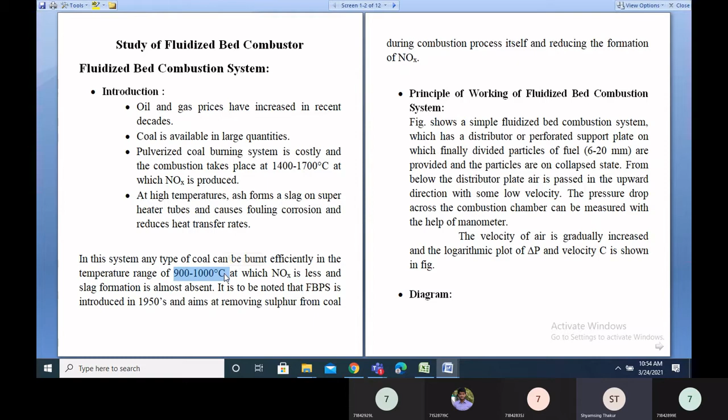The principle of working of a fluidized bed combustion system: a vessel in which water is fitted through tubes, which get heated, converted into steam, and taken out. Here all the heating process is happening - fuel is fed, fluidized combustion air is fed from here, and combustible gases move out.

These are fluidized bed particles, meaning very fine particles of coal used for the particular heating. Whatever heat is generated here is taken up by water, which gets heated and converted to steam. The point to be noticed is the fine particle aspect.

The figure shows a simple fluidized bed combustion system which has a distributor or perforated support plate, on which finely divided particles of fuel, say 6 to 20 mm, are provided, and the particles are collapsed.

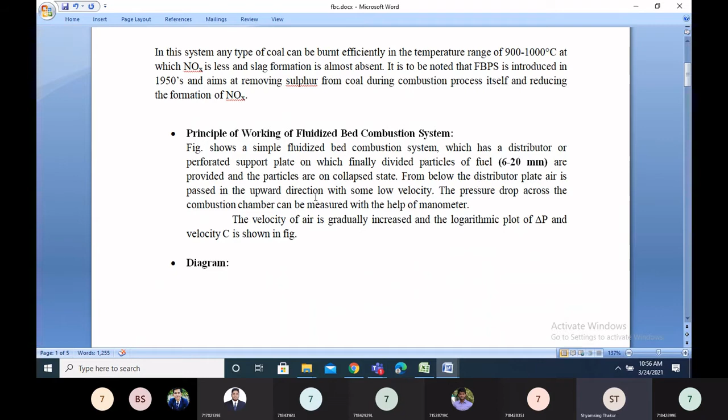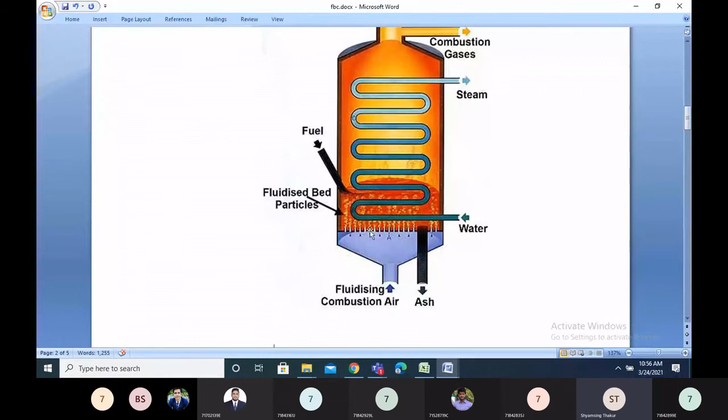From below the distributor plate, air is passed in the upward direction with some low velocity. Here you can see the very fine particles of 6 to 20 mm, and the fluidized combustion air is passed through this, moving upward.

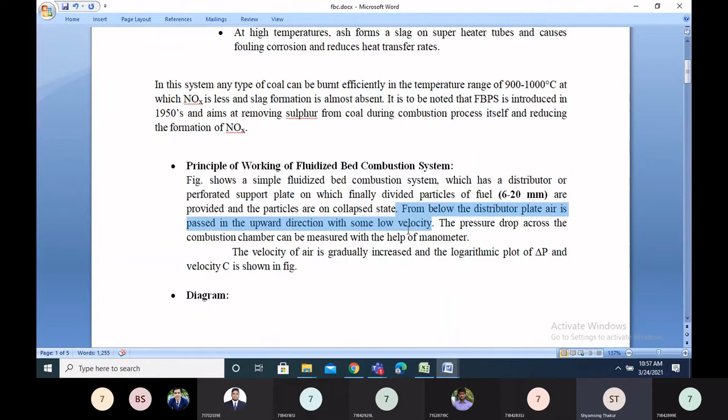The pressure drop across the combustion chamber can be measured with the help of a manometer, and the velocity of air is gradually increased, as shown in the logarithmic plot that we will discuss.

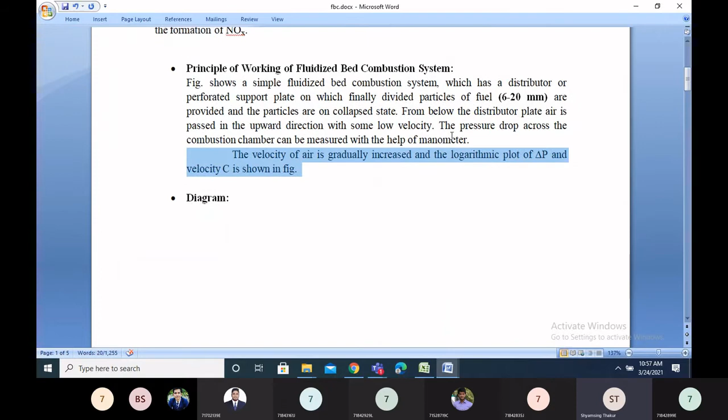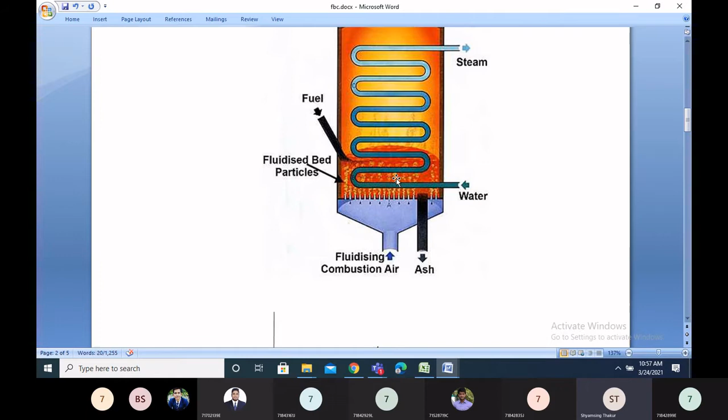With low velocity, air is passing through very small coal particles. When particles are bigger, their surface area is less. When converted into fine particles, the surface area is increased, which improves combustion and heat transfer. That is the concept used very efficiently here.

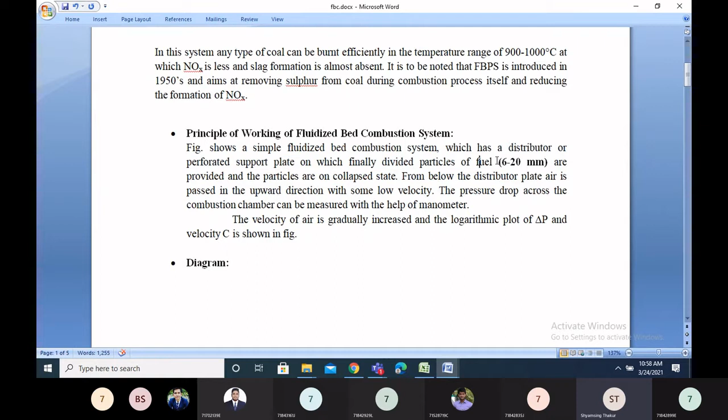So what is there in the system? It has a distributor or perforated support plate with finely divided particles of fuel, 6 to 20 mm, provided in a collapsed state, and from below the distributor plate air is passed upward with some low velocity.

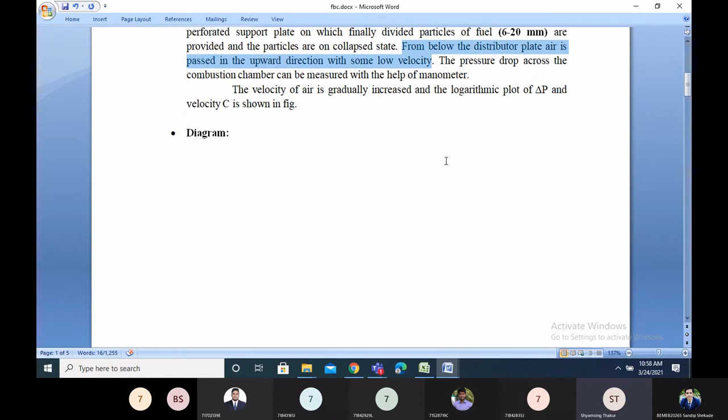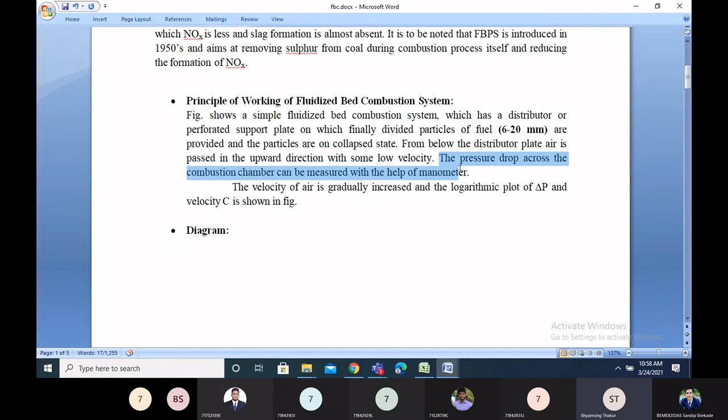This particular path shows that as the particles are fine, they will move with some motion along with the air. From below the distributor plate, air is passed upward with low velocity, and the pressure drop across the combustion chamber can be measured with manometers. The velocity of air is gradually increased and a logarithmic plot is shown.

That can be seen here: initially it increases, then stabilizes. Up to point A, the bed is stable. Between A and B, the bed is unstable, and the particles adjust their position to present as little resistance to flow as possible.

Up to A, the bed is stable; between A and B, the bed is unstable, and particles adjust their position as resistance to flow occurs. When air comes from downward, the particles come into flow and adjust their position to minimize resistance, so the particles are just in contact with each other at point A.

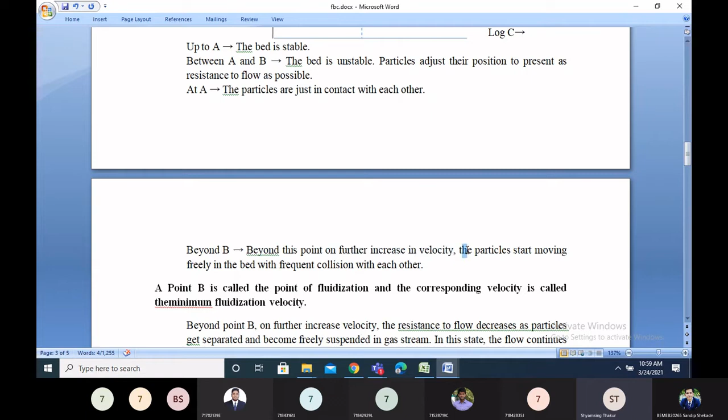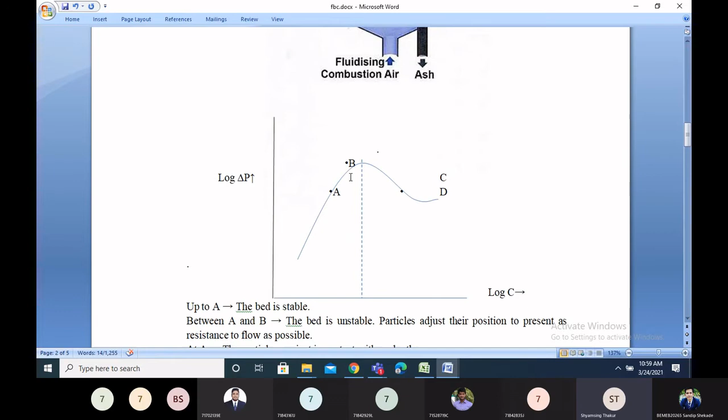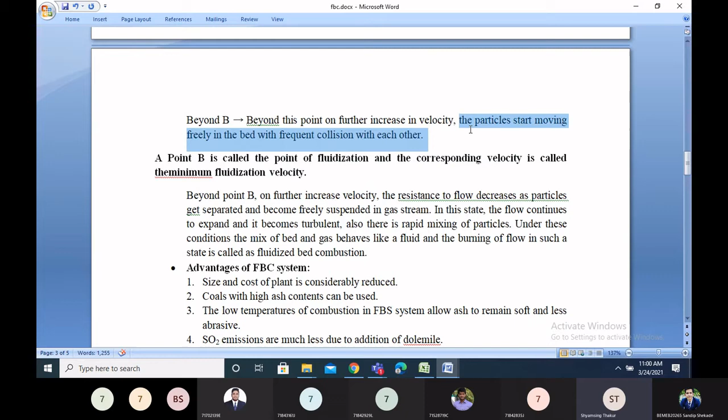Beyond point B, on further increase in velocity, the particles start moving freely in the bed with frequent collision with each other. So when the velocity increases, the particles start moving and it forms a motion over there, as can be seen in the picture.

Point B is called the point of fluidization, and the corresponding velocity is called the minimum fluidization velocity. Beyond point B, on further increase in velocity, the resistance to flow decreases as particles get separated and become freely suspended in the gas stream.

In this state, the flow continues to expand and becomes turbulent. Also, there is rapid mixing of particles. Under this condition the mix of bed and gas behaves like a fluid, and the burning of the flow in such a state is called fluidized bed combustion.

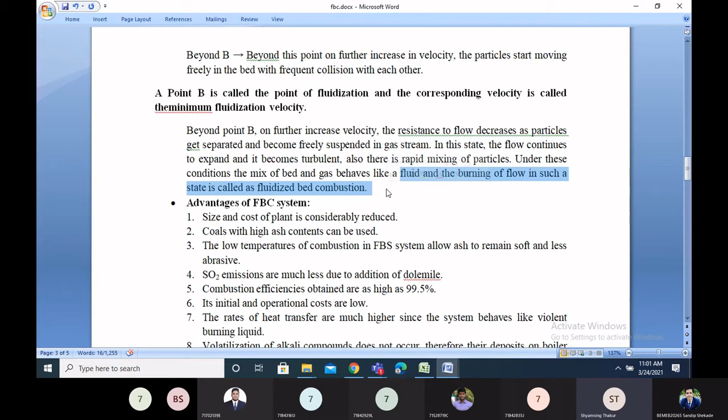So beyond point B, the resistance to flow decreases, the particles become freely suspended in the gas stream, the flow becomes turbulent, and there is rapid mixing of particles, which leads to the term fluidized bed combustion. So quite easy to understand. Now, what is the advantage of this kind of fluidized bed combustion?

The advantages of FBC systems are: size and cost of plant is considerably reduced as there is efficient heating. So for the same capacity of the combustion plant, you need a smaller size, and the efficiency of combustion is increased due to increased heat transfer.

Coal with high ash content can be used - any type of coal can be used with this particular system because it is an efficient process.

The low temperature of combustion in FBC systems allows ash to remain soft and less abrasive. We know initially there were temperatures up to 1400 before FBC. Later on it was reduced to 900 to 1000 degrees Celsius, meaning the lower temperature compared to before allows ash to remain soft and less abrasive.

SO2 emissions are much less due to addition of dolomite. Remember, this is again asked in many examinations - SO2 emission is less due to addition of this particular material in the feed.

Combustion efficiencies are often as high as 99.5%, which is considerably high. And the initial and operational costs are low.

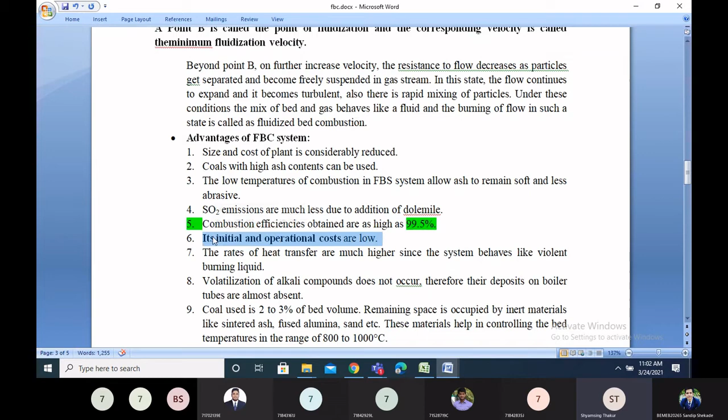The rate of heat transfer is much higher since the systems behave like a violently boiling liquid. Also, the volatilization of alkali compounds does not occur here, therefore their deposits on the boiler tubes are almost absent.

The coal used is 2 to 3% of the bed volume. Remaining space is occupied by inert material like sintered ash, fused alumina, sand, etc. This material helps in controlling the bed temperature in the range of 800 to 1000 degrees Celsius.

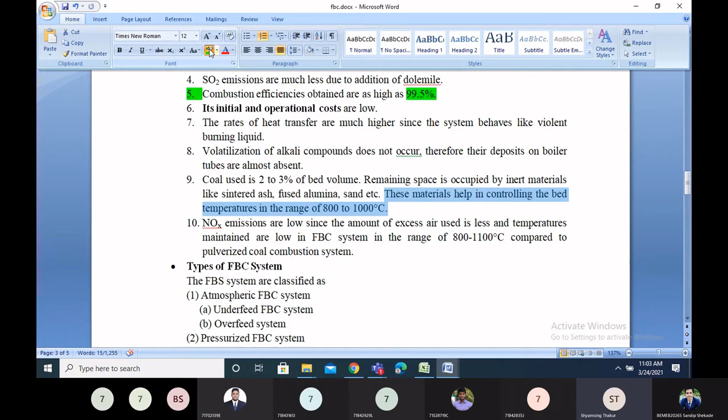This is actually the main advantage - the combustion temperature is lowered from 1400 to 1700 down to a range of 800 to 1000 degrees Celsius, since NOx is produced at higher temperatures.

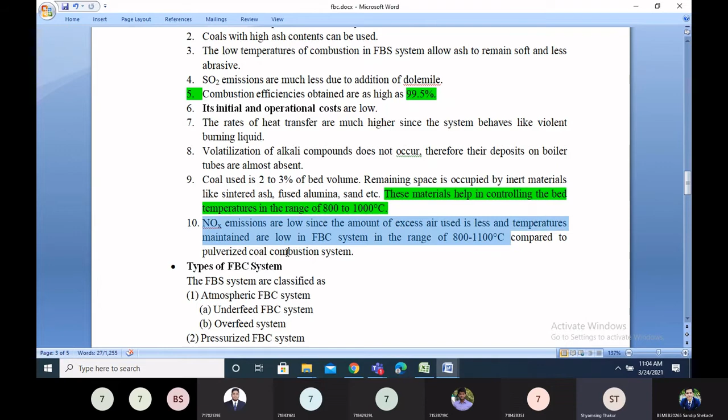In this system, NOx emissions are low since the amount of excess air used is less, and temperatures maintained are low in FBC systems, in the range of 800 to 1100, max 1100, as compared to pulverized coal combustion systems.

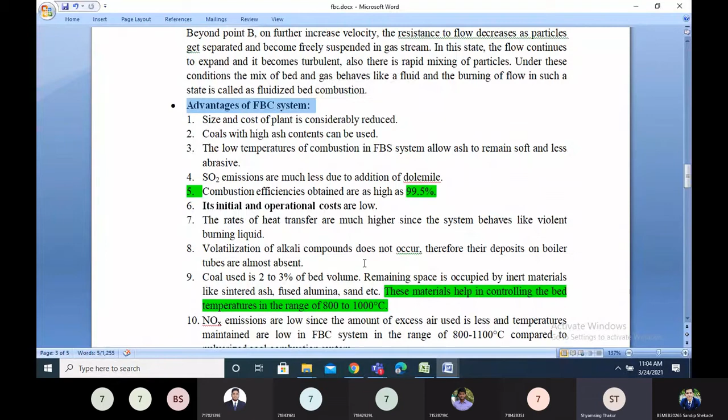So these are basically the advantages of FBC systems. Now moving ahead with the topic of discussion, there are different types of FBC systems.

The FBC systems are classified as atmospheric FBC systems and pressurized FBC systems. Atmospheric FBC systems are further classified as underfeed FBC systems and overfeed FBC systems. So which are atmospheric FBC systems?

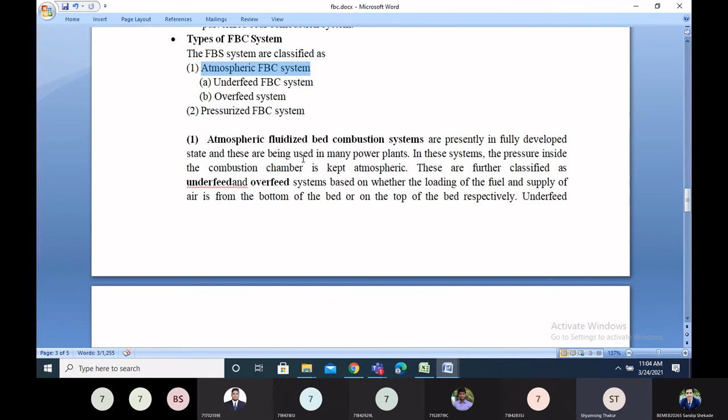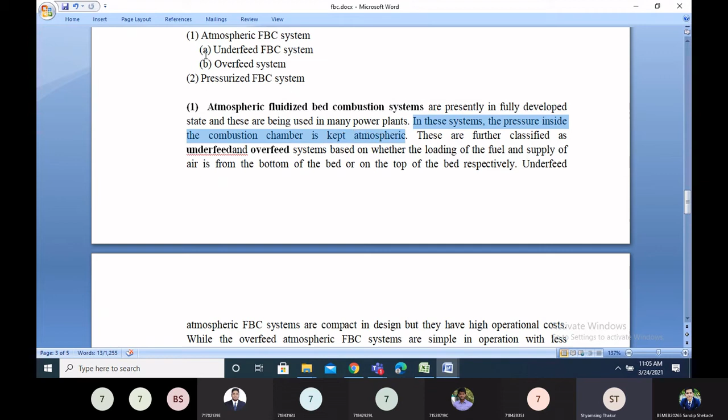Atmospheric fluidized bed combustion systems are presently in a fully developed state, and these are being used in many power plants - this is to be noted. In these systems, the pressure inside the combustion chamber is kept atmospheric, which is why they are called atmospheric fluidized bed combustion systems.

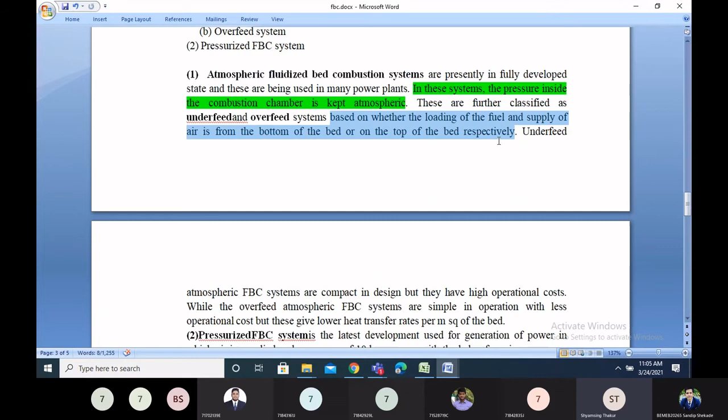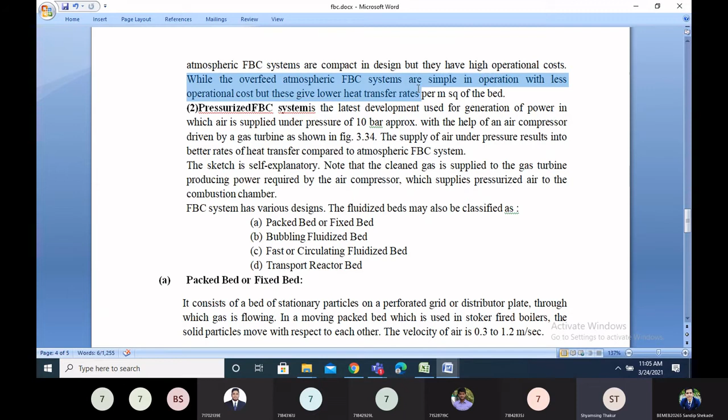These are further classified as underfeed and overfeed systems, based on whether the loading of the fuel and supply of air is from the bottom of the bed or the top of the bed respectively. Underfeed atmospheric FBC systems are compact in design but have high operational cost, while overfeed atmospheric FBC systems are simple in operation with less operational cost, but give a lower heat transfer rate per square meter of the bed.

So there are some advantages and disadvantages of these sub-classifications - underfeed and overfeed atmospheric fluidized bed combustion systems. Based on whether the loading of fuel and supply of air is from the bottom or top of the bed respectively, underfeed atmospheric FBC systems are compact in design, but they have higher operational cost.

Overfeed atmospheric fluidized bed combustion systems are simple in operation with less operational cost, but give lower heat transfer rate. Compared to underfeed, it has some advantages and disadvantages. The advantage of underfeed system is that it is compact in design, but the disadvantage is higher operational cost. In case of overfeed, it has less operational cost but lower heat transfer rate. You must remember this.

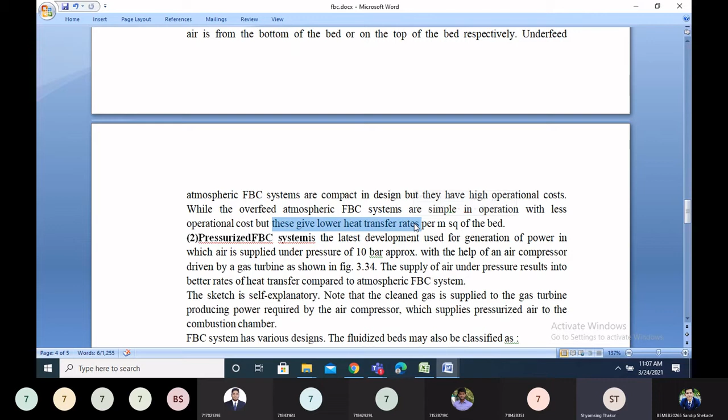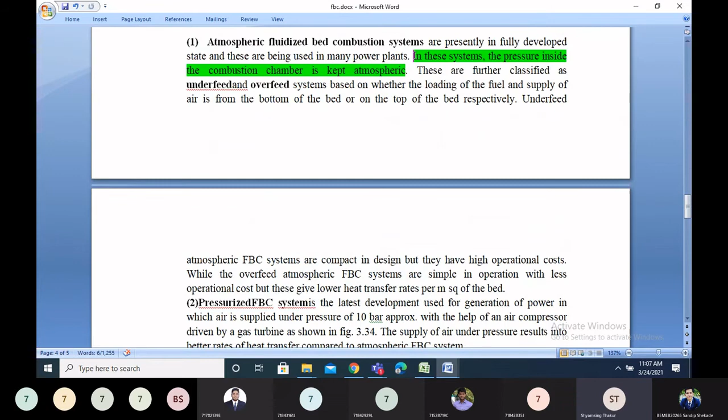Now moving to atmospheric fluidized bed combustion systems, the pressure used is atmospheric. Here the pressure inside the combustion chamber is atmospheric, while in pressurized FBC systems, which are the latest development used for generation of power, air is supplied under pressure of approximately 10 bar with the help of an air compressor driven by a gas turbine.

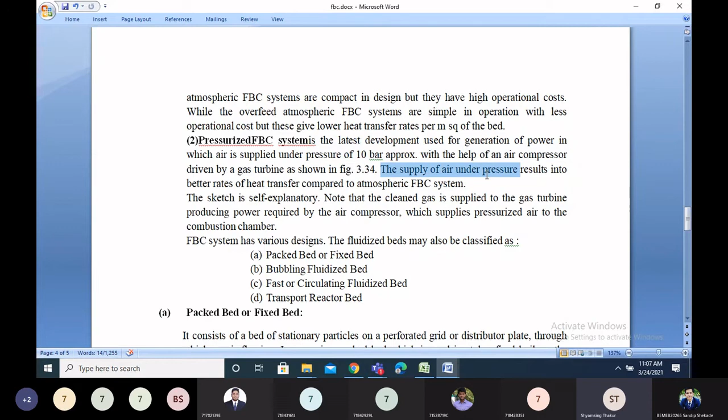As shown in a particular figure, which we will discuss in the next subsequent discussion, with the help of air compressor and the supply of air under pressure, this results in a better rate of heat transfer compared to atmospheric FBC systems.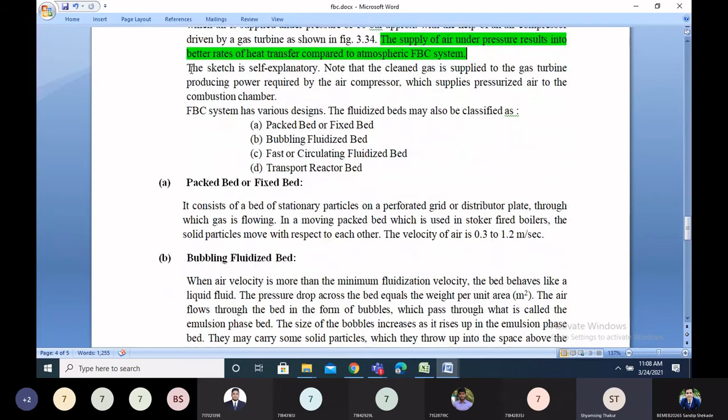Note that clean gas is supplied to the gas turbine, producing power required for the air compressor, which supplies the pressurized air to the combustion chamber.

FBC systems have various designs. The fluidized bed may also be classified as packed bed or fixed bed, bubbling fluidized bed, fast or circulating fluidized bed, and transport reactor bed. The packed bed or fixed bed consists of stationary particles on a perforated grid or distributor plate through which gas flows. In a moving packed bed, used in stoker fired boilers, solid particles move with respect to each other at a velocity around 0.3 to 1.2 meter per second.

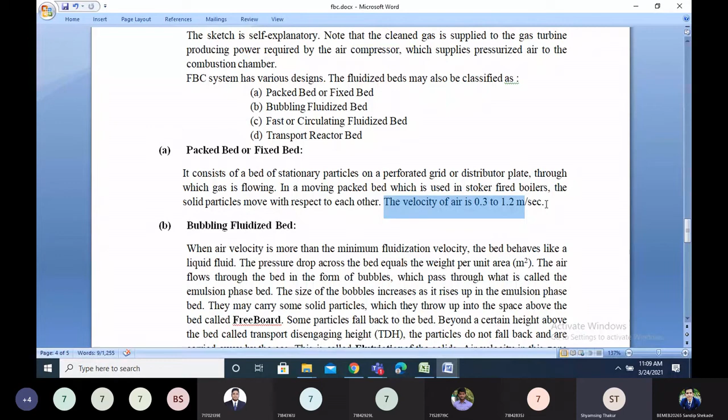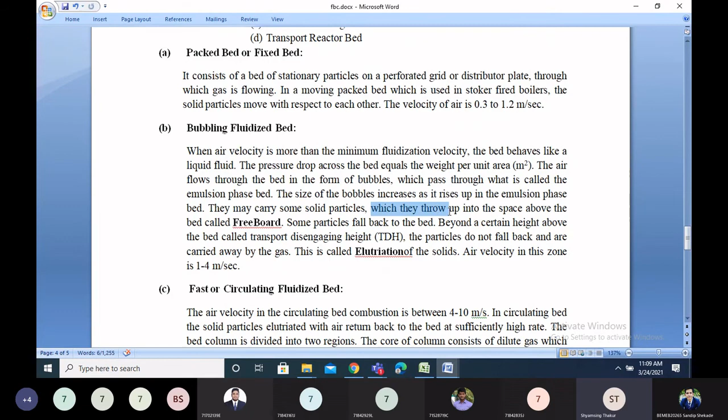Coming to bubbling fluidized bed: when the air velocity is more than the minimum fluidization velocity, the bed behaves like a fluid, and the pressure drop across the bed equals the weight per unit area. The air flows through the bed in the form of bubbles, which pass through what is called the emulsion phase bed. The size of the bubbles increases as they rise up in the emulsion phase bed, and they may carry some solid particles, which are thrown into the space above the bed called freeboard.

Some particles fall back to the bed beyond a certain height above, called the transport disengaging height. The particles that do not fall back are carried away by the gas; this is called elutriation of the solids. Air velocity in this zone is 1 to 4 meter per second.

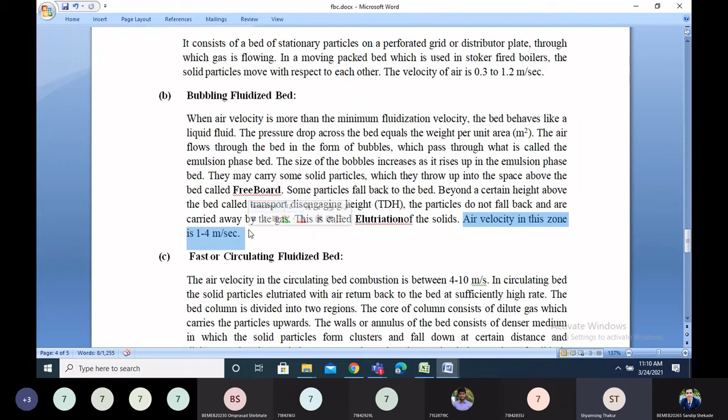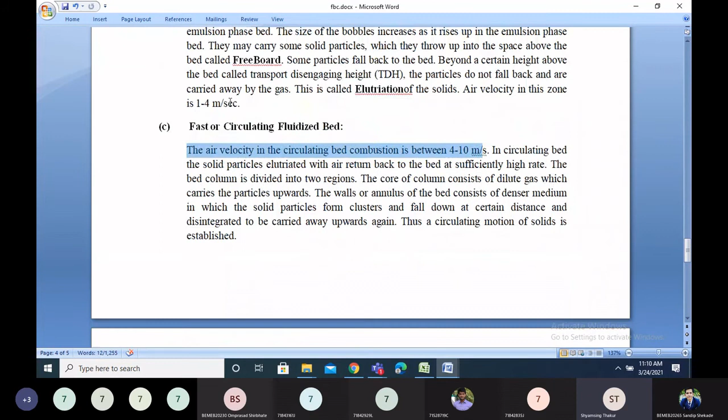Moving to fast or circulating fluidized bed: the air velocity here is 4 to 10 meter per second, and in the circulating bed, the solid particles elutriated with air return back to the bed at a sufficiently high rate. The bed combustion column is divided into two regions. The core of the column consists of dilute gas which carries particles upward, and the walls or annulus of the bed consist of denser medium in which solid particles form clusters, fall down at a certain distance, and disintegrate to be carried away upward again. Thus a circulating motion of the solid is established.

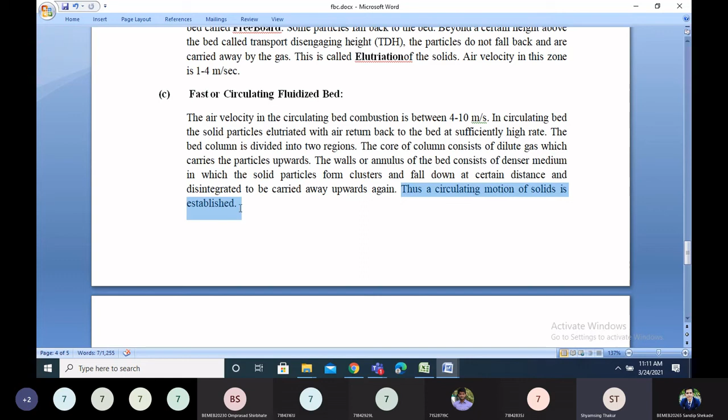Moving to transport reactor bed: when the velocity exceeds 10 meter per second, which is the highest in our discussion range, solid particles are entrained and elutriated with flowing air. They do not fall back as the air velocity is more than the terminal velocity of the bed. This type of bed is usually used in pulverized coal fired boilers.

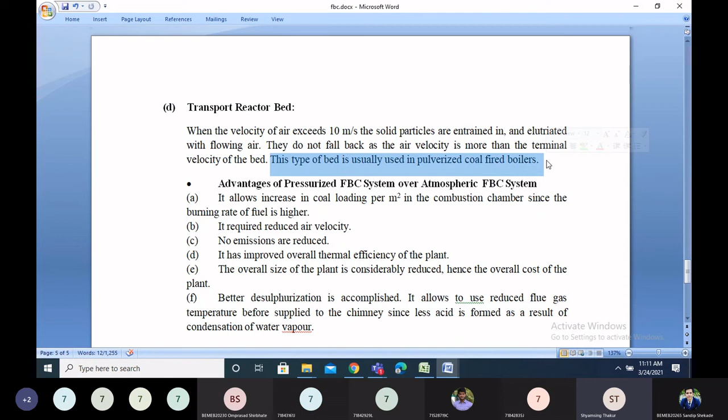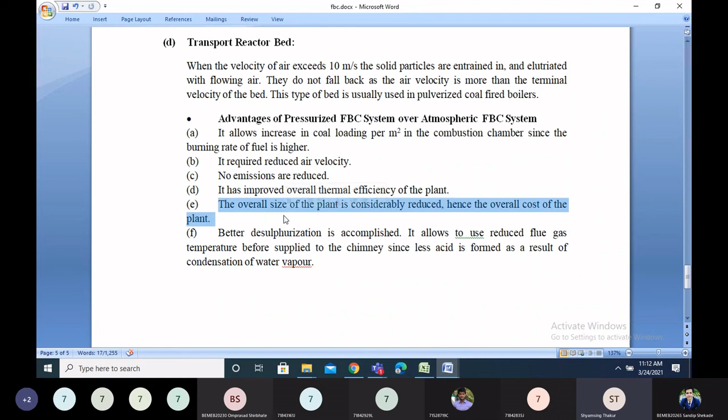Advantages of pressurized FBC systems over atmospheric FBC systems are: it allows increase in coal loading per meter square in the combustion chamber since the burning rate of fuel is higher. It requires reduced air velocity, NOx emissions are reduced, and it has improved overall thermal efficiency of the plant. The overall size of the plant is considerably reduced and hence the overall cost of the plant. Better desulfurization is accomplished, and it allows use of reduced flue gas temperature before supply to the chimney, since less acid is formed as a result of condensation of water vapor.

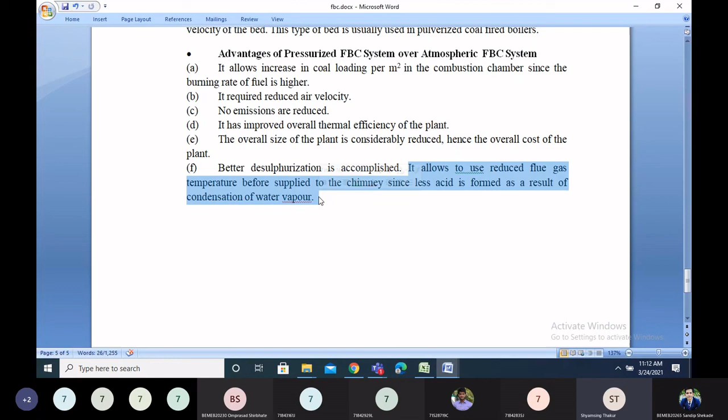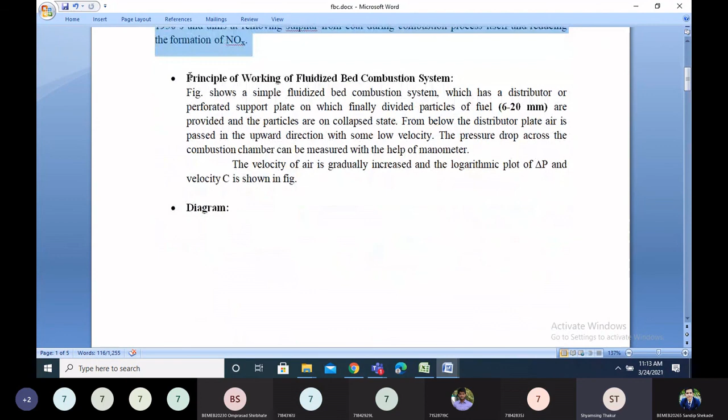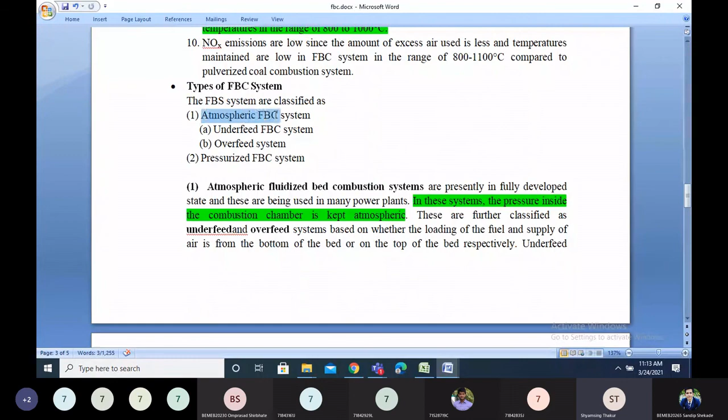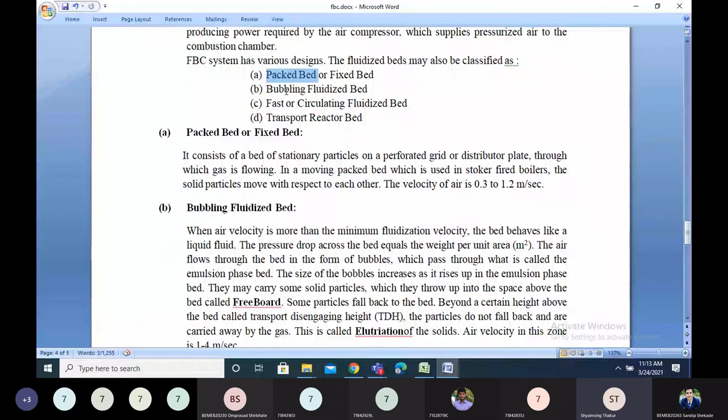So this is all about the FBCs. We have discussed the background of FBC, why it is essential, and the principle of operation of FBC, along with related velocity concepts and the different phases in the working. We have discussed its advantages over others, and then the types, including basic atmospheric FBC and pressurized FBC. We further subclassified atmospheric into underfeed and overfeed systems, and discussed other types of FBC systems based on design: packed bed, bubbling fluidized bed, fast or circulating bed, and transport reactor.